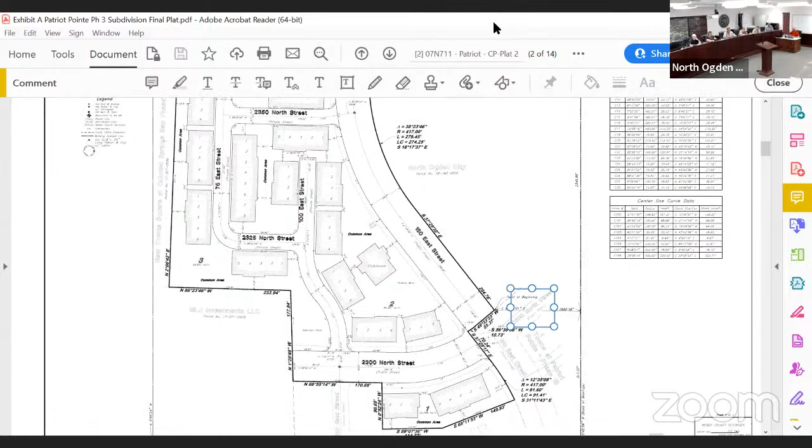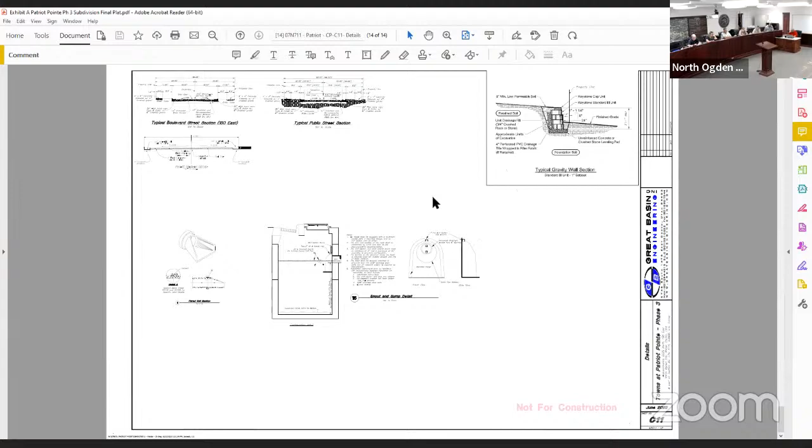Ms. Blanchard - well, I'll make a motion that we grant preliminary approval of phase 3 of the Patriot Pointe subdivision, subject to the city engineer's design memo and the development agreement, but with one change to the condition of approval: to update the design of 2300 North Street to accommodate conformance to our trail system by adding at least a 1 foot pedestrian easement to that 60-foot wide street. Does that cover it? Is that at least where we want to go with that?

She said at least 1 foot. Does that give you enough direction, or do you want her to say 1 foot? 1 foot. Can you amend your motion? Okay, I'll amend my motion to say 1 foot instead.

Wait, just make your heart race just a little.

Okay, we have a motion and a second. Any other discussion about that? Okay, I'm gonna call for a vote.

Commissioner Barker, how do you vote? Yes. Sorry, your last name was failing me. Great. Commissioner Green, you're a yes? I apologize for that. No, you're fine. Commissioner Nancarrow, yes. Commissioner Webb, yes. Commissioner Watson, yes. And I'm a yes, it's unanimous pass.

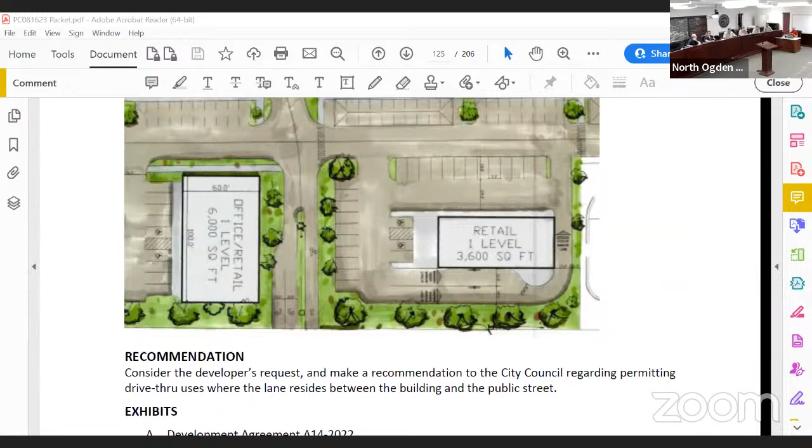I think, I could be wrong, but I think this item was missed back in 2021 in the transition from Rob Scott to me, and there were also some things happening with the building footprints themselves, so I came back in front of planning commission and city council on the building footprints. But I'm thinking in phase 1B we actually didn't do this step, and we've issued building permits. There's nothing, you're not gonna go back and do anything different, but for all phases moving forward per the development agreement, we'll bring the site plan to you.

In the MPC code, the development agreements really rule what you do. There's a lot of information in the master plan community zone, but you really lean heavily on the development agreement. So in this case, it's leaning back on this concept plan that was approved at the time. And it shows a community clubhouse. Here's that pond property here.

The things that aren't completely shown here on the colored site plan are like detention basins, and there's some minor surface parking in here that we went through and counted the numbers on. So this is a really simple item because there were no changes. The buildings conform to the footprints that were approved in 2021, which were a revision of the footprints that moved from this concept plan to the actual architectural drawings. There were some minor differences, between 1 and 3 feet on these large 5 and 8-plex buildings. So numbers of units are the same, number of provided parking is the same.

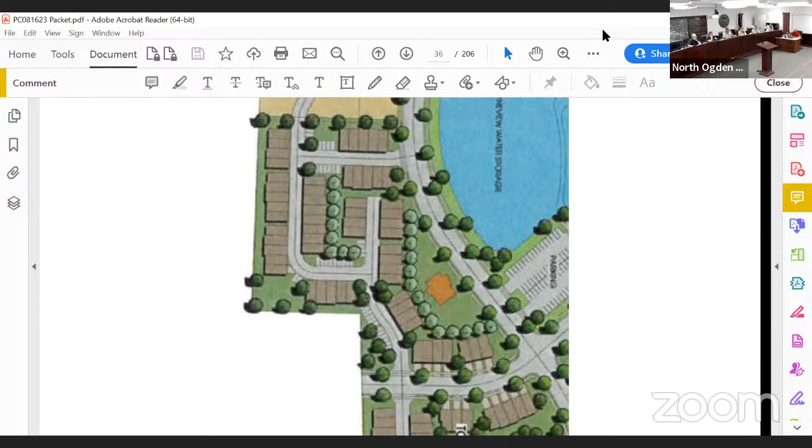So we have the applicant here with us today, Greg Cronin, the developer with Village at Prominence Point. The developer has been working with a number of commercial interests trying to figure out what to do with the pad sites that are south of the car wash on the west side of Washington Boulevard, near 1700 North. It's come up that one of the requirements in the development agreement is that drive-throughs are permitted, but a drive-through where the drive aisle exists between the public road and the building is not permitted. That's, I think, the reason the car wash is positioned where it is, with green space between the building and the sidewalk, and everything wraps back around internal to the site.

That doesn't function for these types of uses. You can create a building like that, but you end up with a kind of teardrop or figure-8 in the parking lot, and it kills the parking and the in-and-out flow of the site. So I believe, and you can talk about this, but they have some commercial interest. It's no secret those have been hard properties to develop. They've sat there since 2017 when the project was entitled. Staff is of the opinion that getting some development down in that area would be really beneficial to just seeing things come vertical, and that might help grow other development and interest down on that side of Washington Boulevard.

The site plan as shown doesn't have one of the details that had been talked about, and I think we should discuss as planning commission a berm element on the east side of the site, and maybe even some specific landscape buffering or something else so that it visually obscures those cars on the east side of the drive aisle.

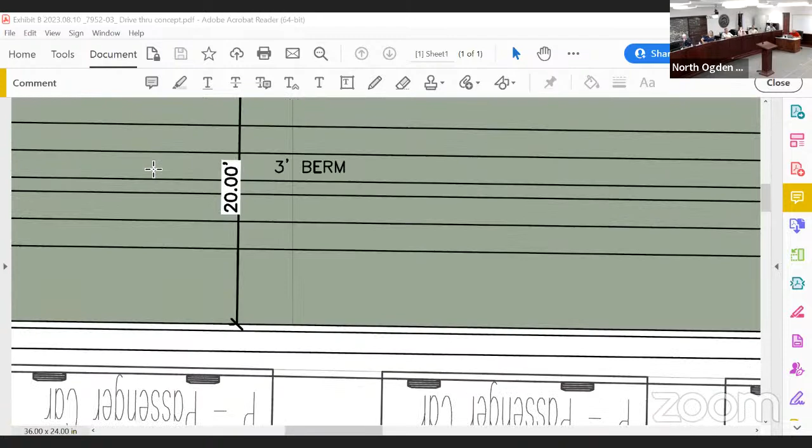This one would have that same amount of green space, but then a drive aisle between the building and Washington. How wide would that green space be? It might be on the site plan, let me zoom in and see. 20 feet, 25 feet, I can't remember. There's a white number there, is it 20, or 3 foot? This one is indicated with a 3-foot berm along there, and then I think it's 20 feet. Okay.

Are there any other clarifying questions prior to our discussion?

Mine is a comment slash question, I guess. The comment is this seems a lot safer than having the drive-through go around the front of the building, so why is that there? Can we hold that for discussion? Well, okay, go ahead. That's fine, I can hold it. I mean, yeah, because I could debate that all day, I think. Challenge accepted. Okay, I thought you might. No, I think 'why is it there' is a purpose question.

So why is there a rule right now that says that can't be on the outside of the building? Well, originally, when Village at Prominence Point was first conceived, it was going to be this walkable center. So the buildings would have been like the cannery extended, this street wall with form-based code type buildings, and one of the principles of walkability is doors face the road, so your foot traffic goes right in. Now you've got street, sidewalk, lane of traffic, and then a building, so it's different from a walkability standpoint.

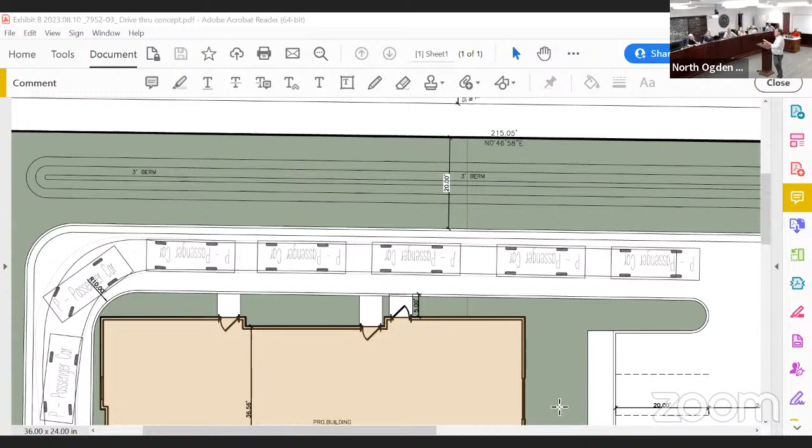I think we're fine, and I appreciate the beginning of the discussion, I really do, because I don't think we've given up on what y'all were trying to do. We've kind of come in and tried to revitalize that a little bit. In fact, this specific area right here, if you'll pan out a little bit, Scott—I guess I need to stay closer to here because it's where the camera is—but you see to the right of this particular pad is our main entrance into Prominence Point.

There, you'll have sidewalks going right there down that entrance into the area. You'll go to the left and come right into the front facing component right here. This right here will actually be an outdoor dining area, seats and stuff where people can come up and eat and do things.

I'm trying to be conscious of the camera. Is there anybody online? It's actually okay, behind you right there. I just wanted to make sure I wasn't leaving people out. Good, you're online now.

But right here we've got that, and then the ability to have dining here. And then we've designed this where we pulled everything to start the stacking.

Look at it, we have a lot of cars here. It depends on what tenant we get, typically 3 to 4 cars, code requires 3. But we've got, when you get to 1, 2, 3, you're right here, 4, 5, 6, 7. We've got ample stacking, but the key is that we're going to maintain glass around this whole area and not make it appear as though it's the back of a drive-through. That's not the intent. We mentioned that with Scott, because this is our gateway into the community.

So this corner is kind of the gateway, and it has the seating, and this is a 3-tenant building. You'd have a drive-through tenant and two other tenants that could go in it, so that it creates more of a busy type of activity, not just a single purpose. Or we'll get a larger cafeteria, or something bigger, or a combination of a couple.

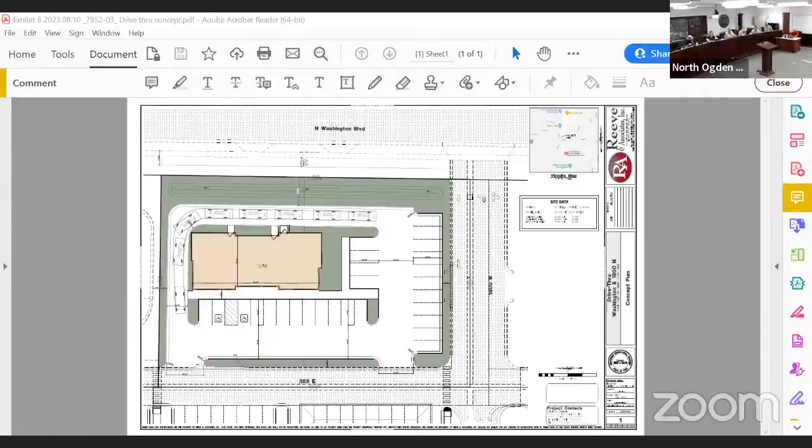Thanks, everyone. Would you like me to stay for the pond discussion, just so you have an audience? I would like the public to be as comfortable as they'd like. I have a question for Scott, so I'll wait. Well, let's move on to public comments. If there be any, nobody online, still, great. Is it public comments? You want me to ask Scott's question now? Don't do that. Okay, yeah, if that's not for the body, then no. Okay, then let's hold that.

Okay, remarks from planning commissioners. I would be interested in hearing the discussion on the pond. Is now an appropriate time for everyone?

So that's an item I've wanted to see for 3 or 4 years now. I've seen the opposition to it, which I felt is irrational. I've seen the legislative problems with it, with Pineview Water Systems and things, and I was under the impression it was dead in the water. I know, no pun intended.

This pond issue originally, when it came up, the city council voted it down at least 2 times. I talked to a couple of city council people about why it was voted down, but it keeps coming back. They said they had no option because of a conversation the mayor at that time had with Pineview and locked them in. I asked, so why keep voting it down? Because our message loud and clear is not accepted by everybody in the community, but it still had to go through.

So is this an active item that's going to come before us for approval? And if so... Sorry, go ahead. No, you. So John can talk about the specifics of the grant.

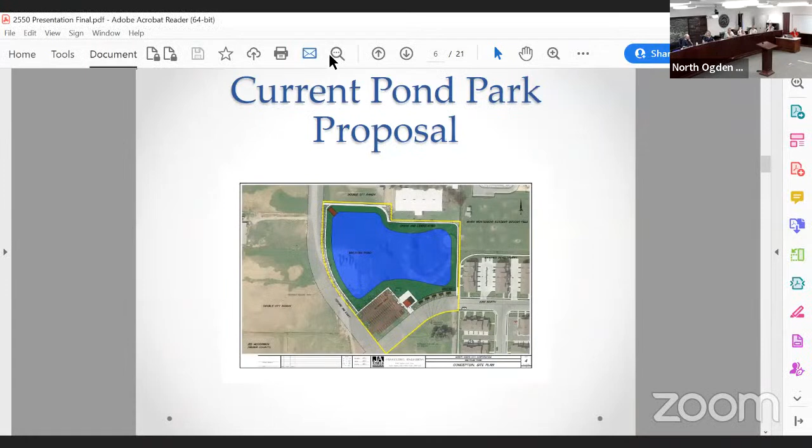My question is, I don't want to sound lazy here, but what is our hope to gain from debating this tonight or discussing? I was just interested.

I don't know either. The reason I brought it up is that we're operating with the MPC development agreement for Patriot Point, and there's a few development agreements going through. On Monday, it came up from the developer that they had the right and interest to offload their storm detention water into this pond. Which is fine, we all agreed with that. That was part of the process.

This is a regional detention basin, and you can think of detention basins as they march down the hill like wide spots in the street. They hold water and then meter it out, like your bathtub does when it gets full so it doesn't spill over. That water finds its way into another pond, and another pond. They work like a string of pearls, and being a regional detention basin, this will collect water from a huge swath of this area of the city.

So that was always fine, we had the capacity to do it. When it came down to the design, five years later, from the development agreement at Patriot Point to our designers working on it, the floor of the water, or the floor of the bathtub overflow, didn't work between the two elevations. So what would have happened is if this project to the west of the pond had outflowed their water, and then we had a really high water year and the pond filled up, their detention basin would have been the spot where all of the water flowed out into.

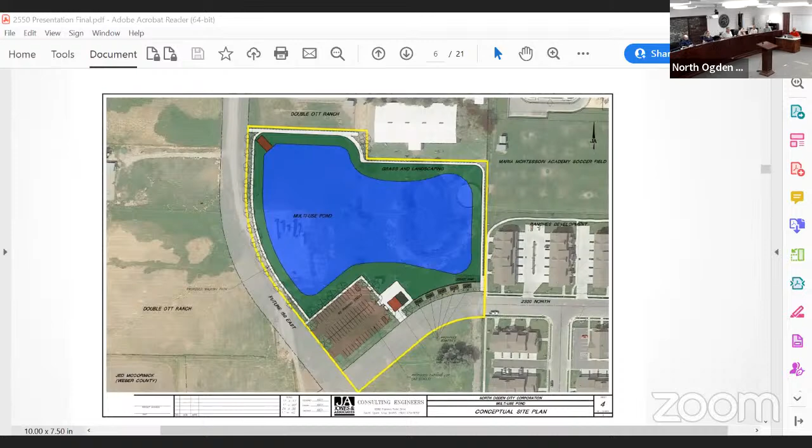Other remarks, Commissioners? I hated to hijack all your remarks. Anybody have anything else?

I think staff needs to be commended again. I think the work it sounds like they've done with the developer here, taking a complex project—I think the combination of what staff is doing is helping this project. I do agree with what you said, Mace, that the fact people aren't here with pitchforks is probably a function of you having the meetings with them and staff doing the work to get this going in the right direction.

And with this detention pond, the same thing is happening. So I think staff deserves a lot of credit for organizing things in a way that everything doesn't have to come before us. And when it does come before us, it's a little more orderly, working with multiple stakeholders to make sure we're moving things forward and things aren't just sitting.

Because we do have a community where there is demand, a community that has population. But if staff can't work with the people who actually want to move dirt, and they don't get a 7-month deadline, things won't happen—they'll do it in a place that's easier to work with. So I think staff gets a lot of credit for what you guys are doing. I want to say thank you.

Thank you. Thanks, Johnson. Okay, other remarks?